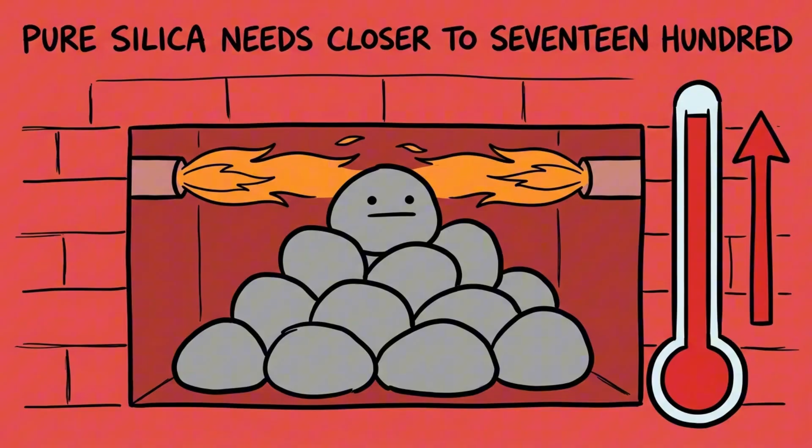The furnace that made your window has been burning for 15 years without stopping once. It sits at around 1500 degrees Celsius, night and day, weekends included. And here is the part that does not add up: sand does not melt at 1500 degrees. Pure silica needs closer to 1700. So how does a glass factory melt sand in a furnace that is 200 degrees too cold?

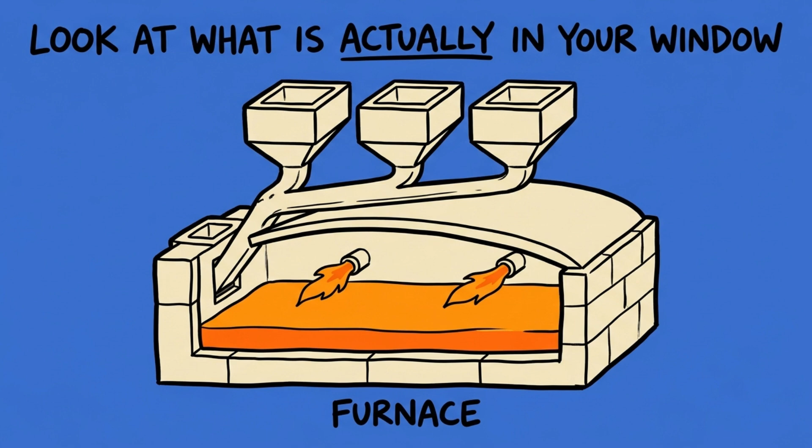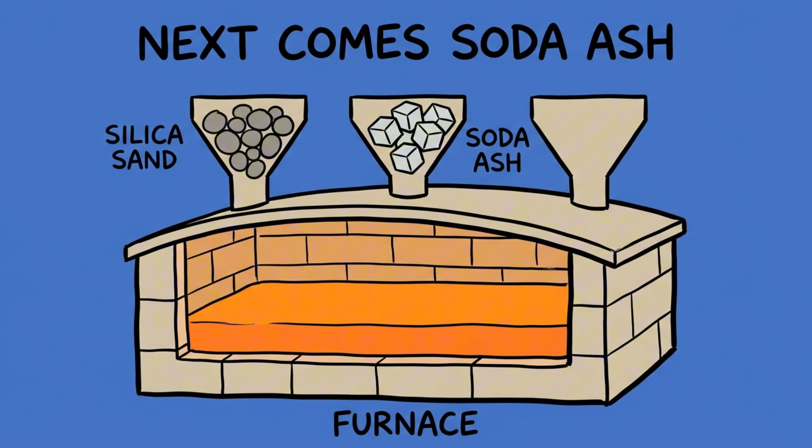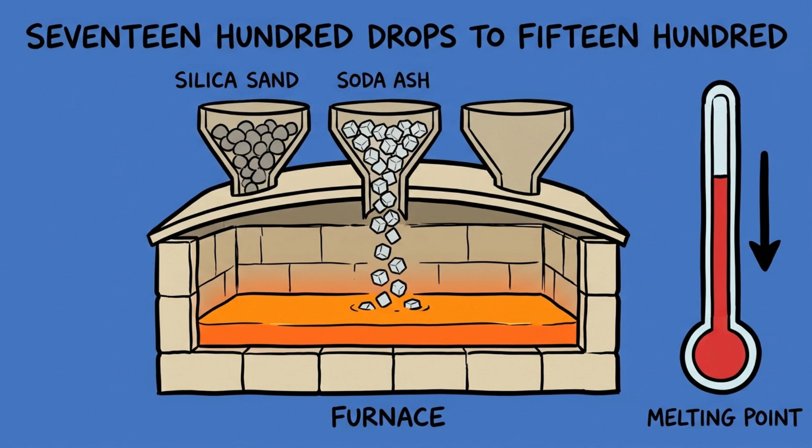It never tries to melt sand on its own. Look at what is actually in your window. About 7 parts in 10 is silica sand, that is the glass itself, the part you look through. Next comes soda ash, sodium carbonate, roughly 1 part in 7. Soda ash is the whole trick. It reacts with the silica and pulls the melting point down from around 1700 degrees to somewhere near 1500.

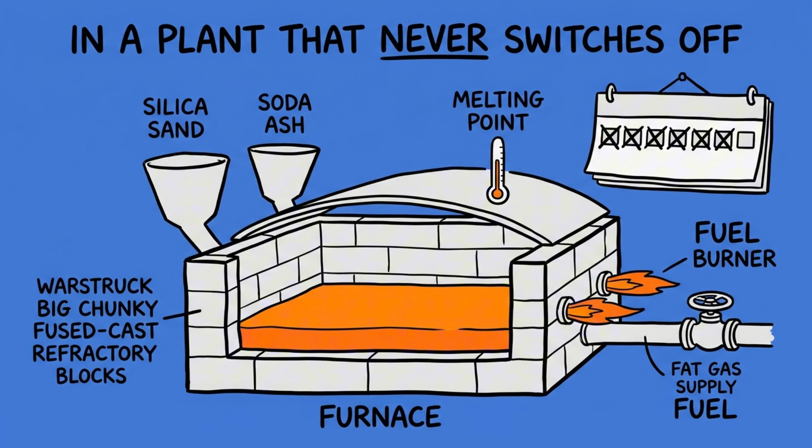That is why the furnace can run cooler. Less heat means less fuel burned, and in a plant that never switches off, 200 degrees is a staggering amount of energy over a decade.

But soda ash breaks something while it fixes something. Sand and soda alone give you a glass that dissolves in water. Slowly, but it dissolves. Your window would not survive the rain. That material actually exists, and it has a name. It is called water glass, and it is sold as a liquid.

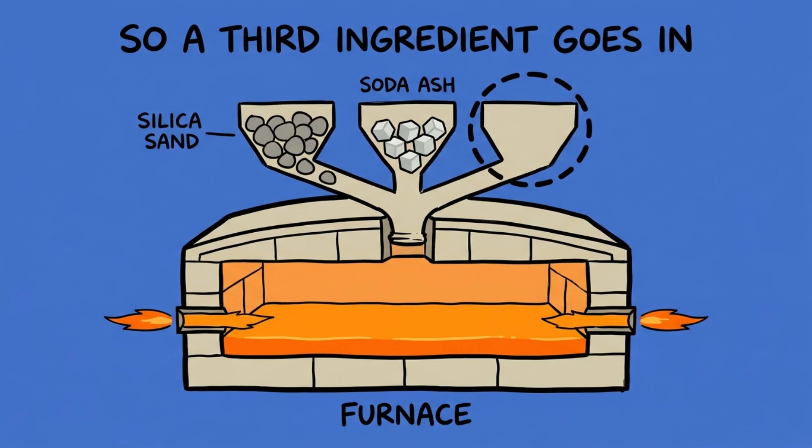So a third ingredient goes into the batch: limestone, calcium carbonate, roughly 1 part in 10. Limestone is the stabilizer. The calcium locks the structure so the finished pane shrugs off rain, cleaning products, and time. Sand, soda, lime. That is why the stuff in your window is called soda lime glass, and it is close to 9/10 of all the glass made on Earth.

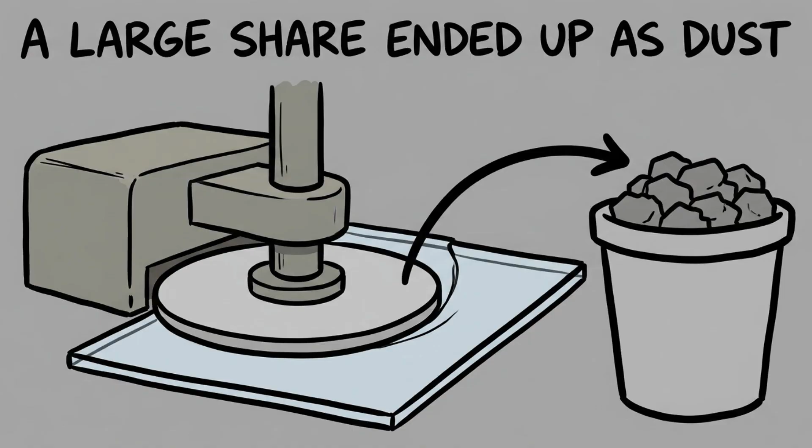Now the mixture is liquid, and the hard part has not started, because molten glass is not flat. Until 1959, flat glass was made the brutal way: cast it, cool it, then grind and polish both faces until they were smooth. It was slow, it threw away a large share of the glass as dust, and it burned a fortune in energy. Then a British engineer named Pilkington had an idea in 1952 and spent 7 years making it work.

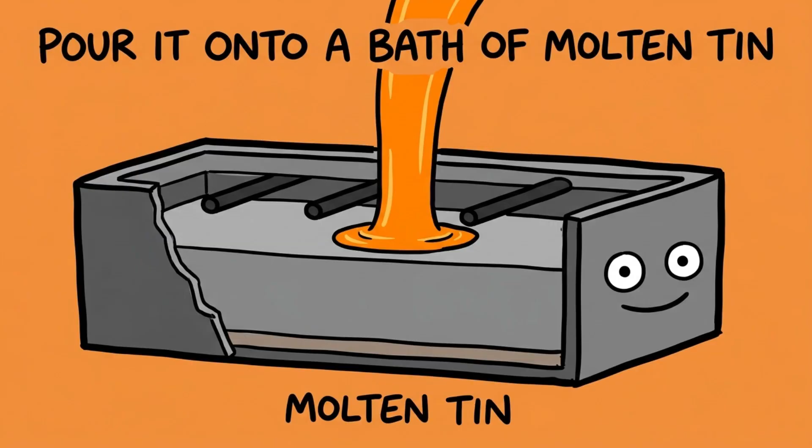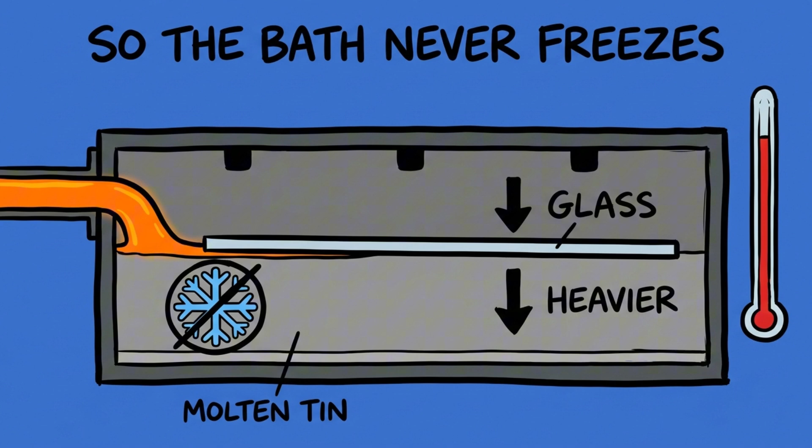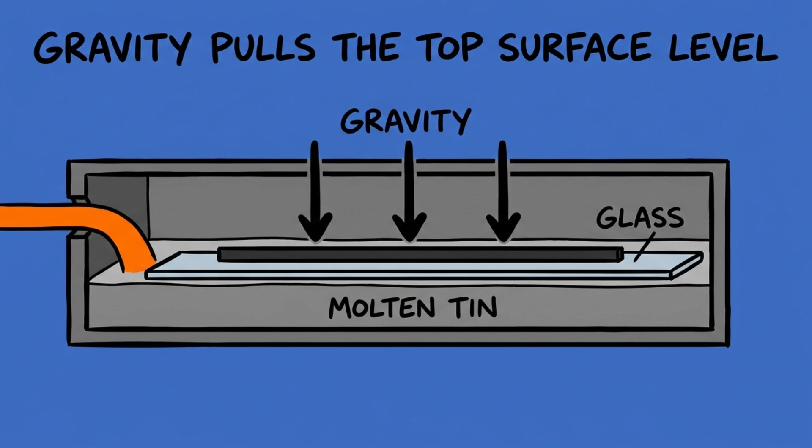Pour the molten glass onto a bath of molten tin. Watch what that does. Tin is denser than glass, so the glass floats on top. Tin also stays liquid across an enormous temperature range, so the bath does not freeze under a river of hot glass. And a liquid floating on a liquid does something no machine can match. It flattens itself. Gravity pulls the top surface level. Surface tension smooths the underside against the tin. No grinding, no polishing, 2 perfect faces for free.

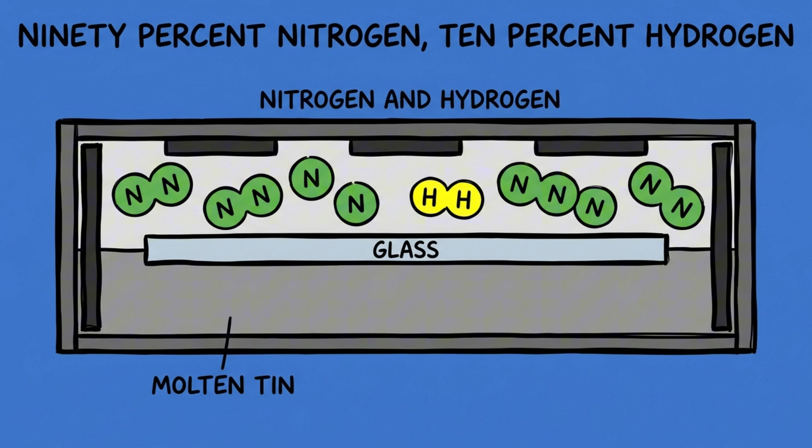There is a catch, and it is the reason this took 7 years. Tin loves oxygen. Open that bath to the air, and the surface turns to tin oxide, which sticks to the glass and ruins every pane coming through. So the whole tin bath sits sealed under a blanket of gas, roughly 90% nitrogen and 10% hydrogen. The hydrogen grabs any stray oxygen before the tin can reach it. Your window is flat because a hydrogen atmosphere was protecting the metal underneath it.

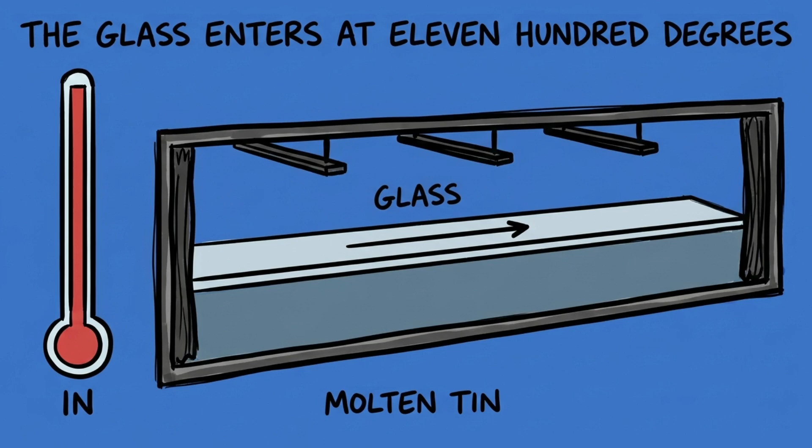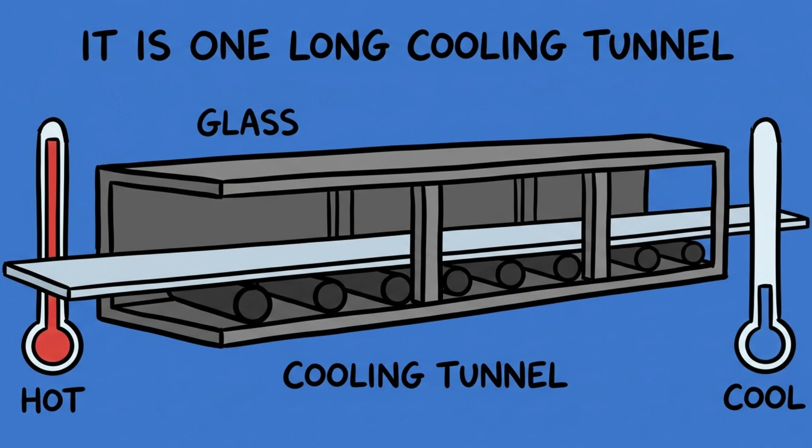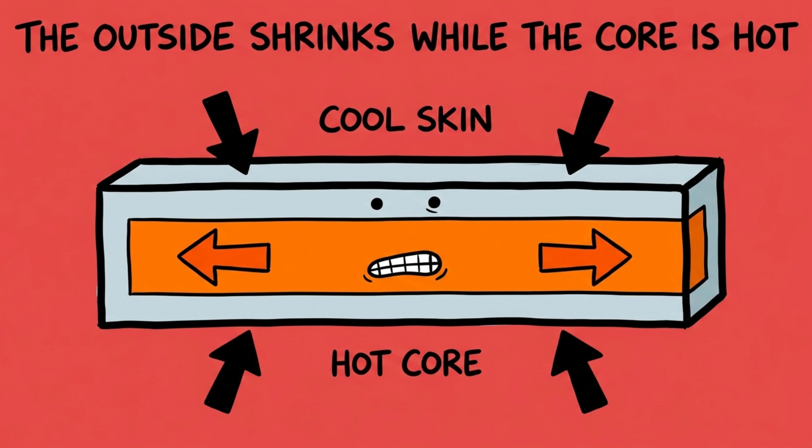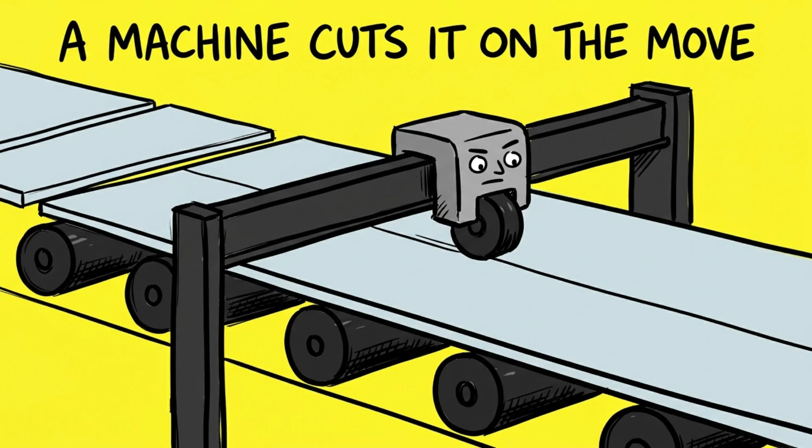The glass enters the tin at around 1100 degrees and leaves at around 600, by then stiff enough to be lifted onto rollers. Then it goes into the lehr, a cooling tunnel, and on a float line, it can run for well over 100 meters. The ribbon crawls through it while the temperature comes down slowly and evenly. Rush that step, and the outside contracts while the core is still hot. The stress locked into the sheet would crack it later, sometimes days later, sitting in a warehouse. At the far end, a machine cuts the moving ribbon on the fly.

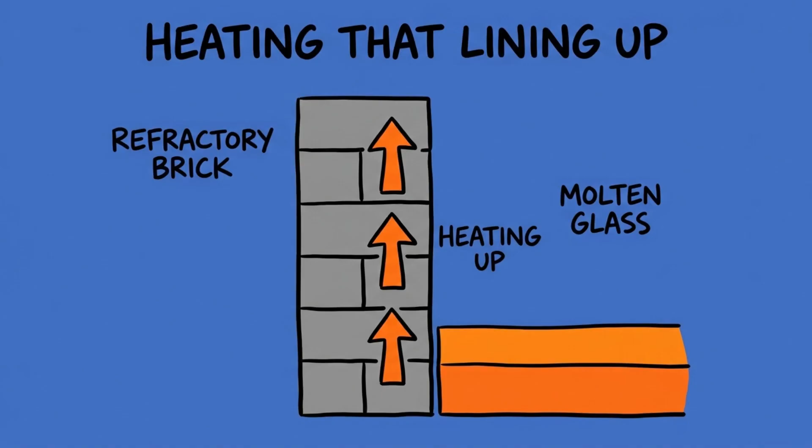So now go back to the furnace that never switches off. The tank is lined with refractory brick, and heating that lining up or cooling it down puts it under enormous thermal stress. Do it carelessly, and you crack the vessel holding 1500 degrees of liquid glass. A shutdown and restart is reported to cost millions in repairs and lost production. So the plant does the arithmetic and simply keeps burning fuel for 10 to 15 years, until the furnace is worn out and has to be rebuilt anyway.

That is the honest reason glass is one of the most energy-hungry materials you own. Not the melting, the waiting.

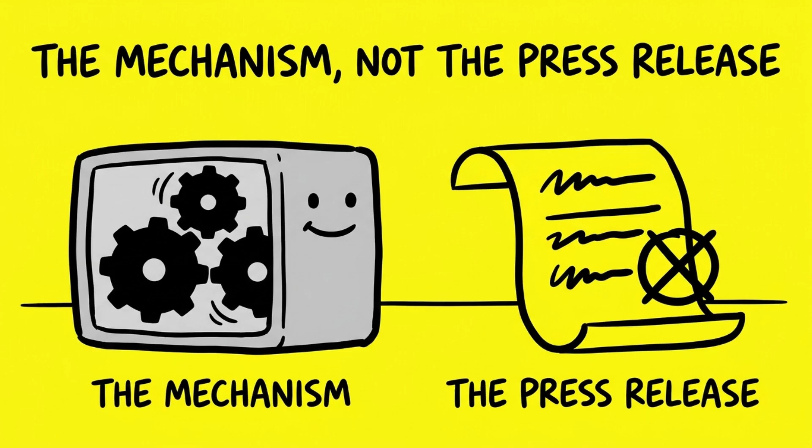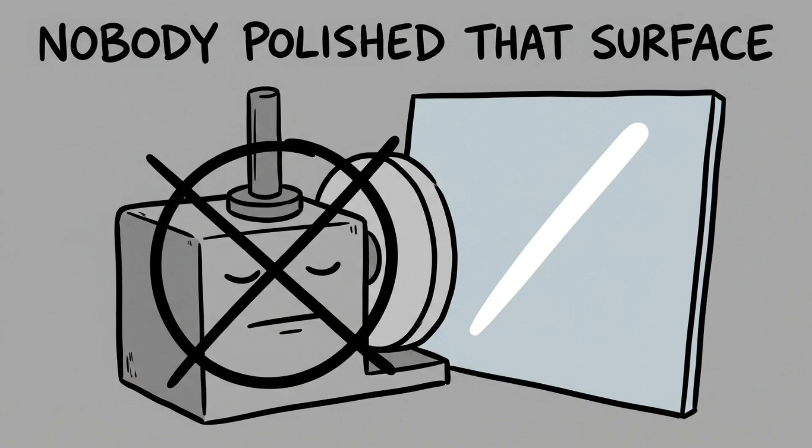So the next time you look through a window, remember what you are looking at. Nobody polished that surface. It is a liquid that was allowed to float and told to lie flat by gravity.